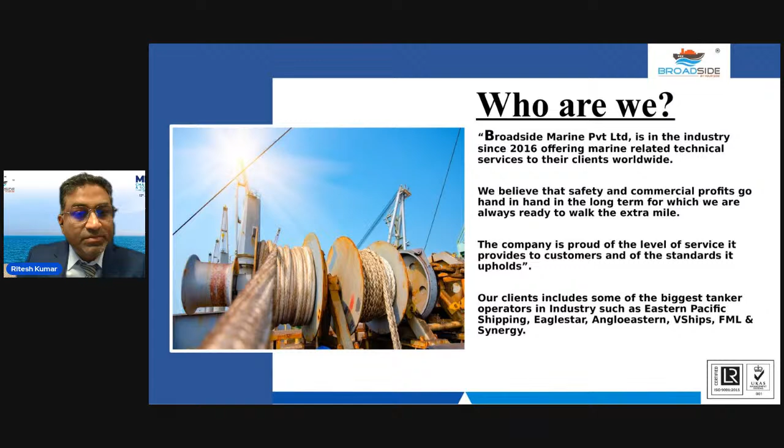Our association and engagement with MEG4 started a little later, in 2019, the year after it was published in 2018. At first, we started with designing MSMP, LMP, which was required immediately. But as time grew, we graduated to provide end-to-end solutions for continued MEG4 compliance.

Today, we provide everything from gap analysis for mooring procedures, designing of MSMP, LMP, mooring reviews, be it vessel specific or fleet specific, risk mitigations, mooring analysis, mooring evaluations, engineering assessments, re-strengthening exercises, and associated shipyard supervision.

Then why are we here? In what capacity? Well, we have helped more than 250 vessels with MEG4 compliance over the last few years. During this period we have gained a lot of knowledge, seen a few gaps, and been able to navigate through those gaps.

In this, we've had a lot of communication with tanker operators, classification societies, shipyards, equipment manufacturers, and rope makers. MEG4 was published by OCIMF mainly for the tanker industry, but it's so comprehensive on vessel mooring that it is now advocated by classification societies and used by IMO for framing rules for new builds after 1st January 2024. And these new builds are not only tankers, but all cargo ships above a certain tonnage.

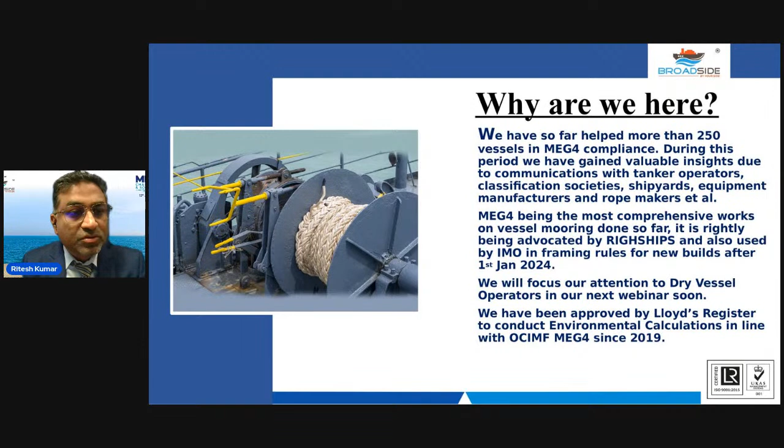We are also planning to focus our attention on dry operators for the same reason. We have been approved by Lloyd's Register to conduct environmental calculations in line with OCIMF MEG4 since 2019. So this was a little bit about me, our company, and our work with respect to MEG4. These are my contact details.

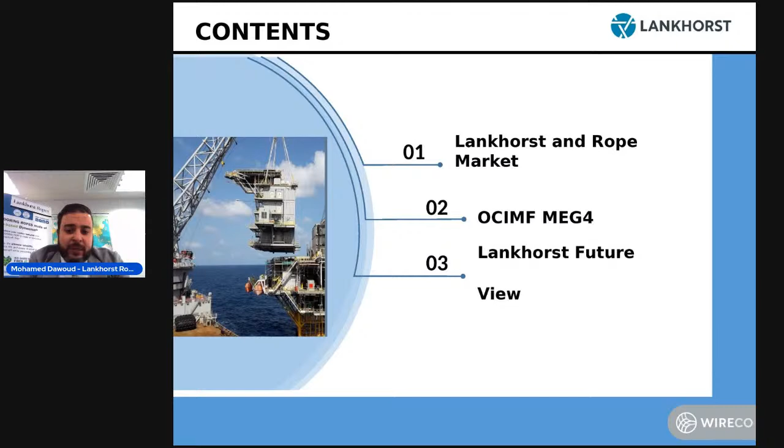Today our presentation will be divided into three topics: a small briefing about Lankhorst Ropes, second about MEG4, and number three about Lankhorst's future view for ropes.

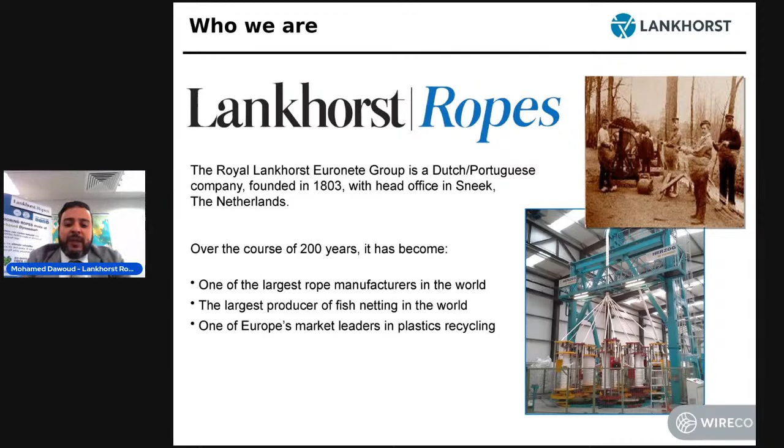Lankhorst Ropes is the world leading rope manufacturer for steel and synthetic ropes with more than 200 years experience. Our head office is in Sneek in Holland. Through 200 years acting as a market leader for manufacturing synthetic ropes and steel ropes, we have become one of the largest rope manufacturers in the world and the largest producer of fishing nets in the world, and one of the European market leaders in plastic recycling.

Lankhorst, we are operating worldwide through our sales offices and global stock points. We like to call them service points, because these points are not only for stocking ropes, but we have a qualified team of splicers who can attend the vessel for inspection, for training the crew, rejacketing for some ropes, and other services.

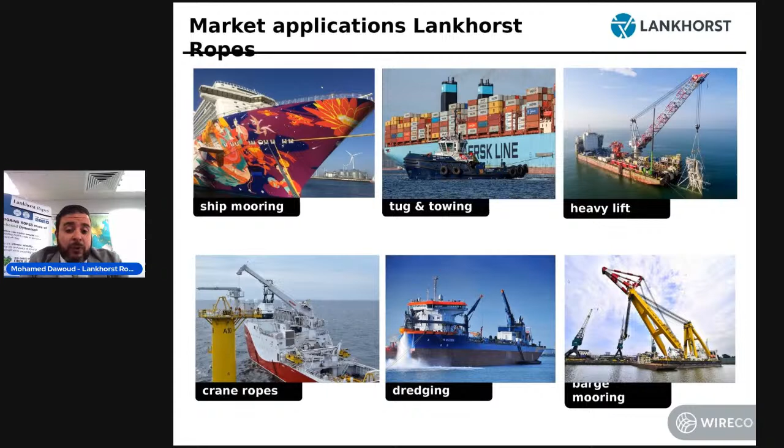We are operating as Lankhorst Ropes in many categories, more than 6 market applications: ship mooring, which we will speak about today, tug and towing, heavy lift synthetic, and also crane ropes, dredging, and barge mooring.

When we speak about OCIMF, as we all know it came in 2018 to enhance safety, which is the core for what we all do, and to enhance the communication and relation between the ship owner, ship operator, and the rope manufacturer, and also to increase communication.

Also, it came with a new terminology, because during MEG3 we had different terminology, like only the MBL, and some rope manufacturers were considering the unspliced MBL, while some of them were considering spliced MBL in their certificates.

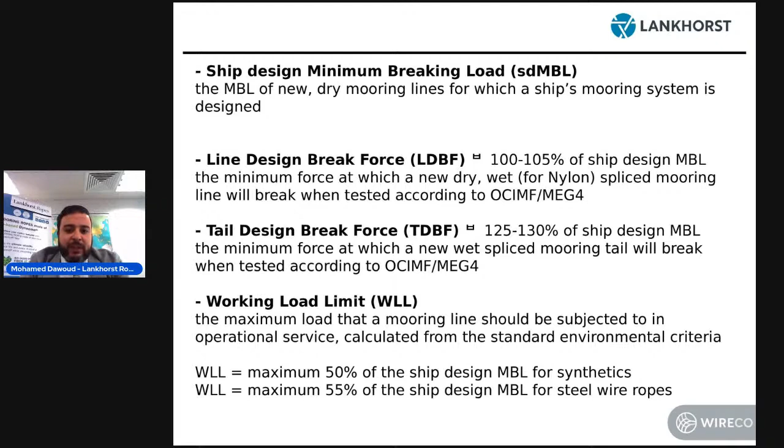So the ship design MBL and the LDBF came to unify and have only one standard, tested accordingly for line, for tails, and so on. MEG4 came with responsibilities for both ship owner and ship operator to comply, by having the ship design MBL defined and also implementing the line management plan. For us as a rope manufacturer, we need to comply, having all our products supplied to the wet cargo segment or tankers comply with the test program.

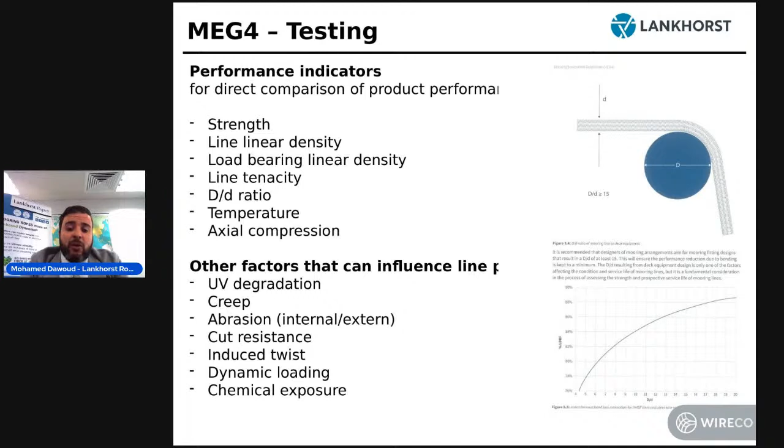So it is a lot of tests to be done. It needs commercial investment from us as well, and it takes time to bring our entire ropes portfolio to MEG4 compliance. We started this since 2018 as Lankhorst for our whole ropes portfolio, but after 2019 we started to see what's happening in the market, and that's what we'd like to highlight to you.

Rope makers or rope manufacturers are divided into 3 groups. One group fully complies with MEG4. They did the tests as per MEG4 and were attested by a third party, by class, and then they started supplying to their customers accordingly.

Group B did no testing at all, but what they did is create a certificate formatted like a MEG4 certificate, attested only by their own quality department, not by any class. So you can have a certificate which looks like MEG4, but when you look at the stamp, it's by their quality department, not by a third party.

Group C, which we feel is more hazardous to the industry, did partial testing. So you can have a rope with a certificate, a coil 3.1 certificate, attested by class. But if you check the type approval certificate behind it, you'll find they didn't do the full test. This is more dangerous, because you are purchasing ropes assuming they comply with MEG4, but they don't. You may have only 10% or 20% of the tests done, and that's what the class attested the type approval based on.

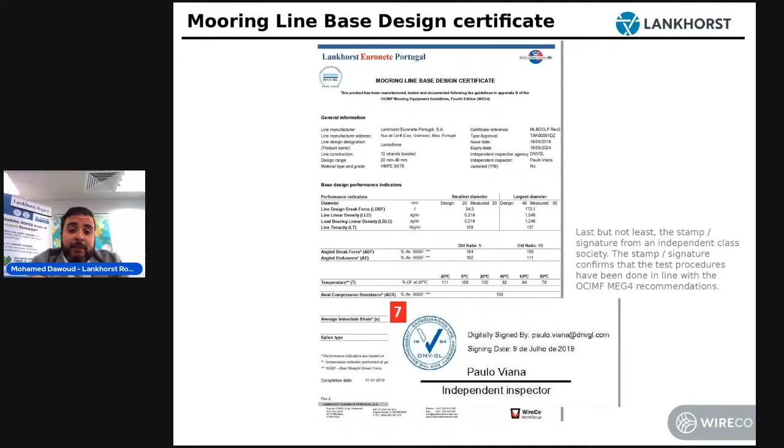Just to show you how the mooring line base design certificate looks like, please ensure that down below, in the right or left, you have a stamp from class - DNV, BV, ABS, whatever - to be attested by class. Also this is a type approval. I highly recommend for all ship operators and owners to ask to see the type approval which has the certificate of the coil based on it.

Please go through it, especially page number 2, and see the two hardest or most critical tests: angled endurance and axial compression fatigue. You can find people who didn't do it correctly, because angled endurance and axial compression fatigue really judge your rope's quality - if your ropes have bad or very low quality, you will not pass.

So some rope makers did partial testing for the type approval, which they will not share with you, but they will share the 3.1 certificate, which doesn't show which tests were actually done. So we recommend that not only the 3.1 certificate that comes with the coil is important, but the type approval is very important, and the base design is very important.

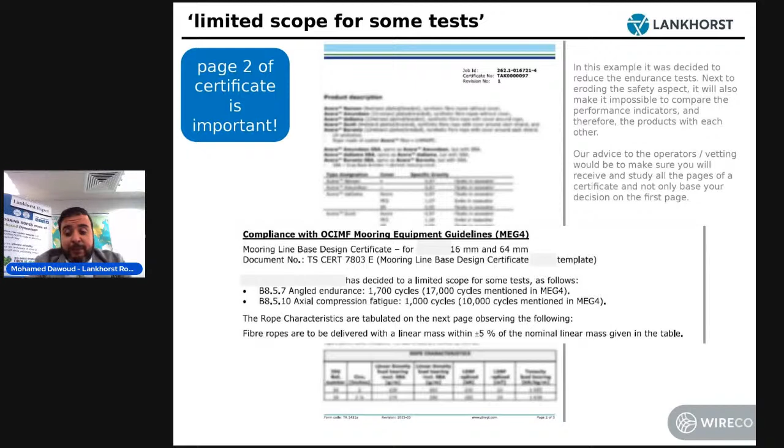We are proud that at Lankhorst, since the launch of MEG4 until today, we have zero comments or observations from any inspector globally. We supply to most of the global fleets worldwide, and we're proud that until now we have zero comments on our ropes. This is what we recommend for tanker operators and vessel owners globally.

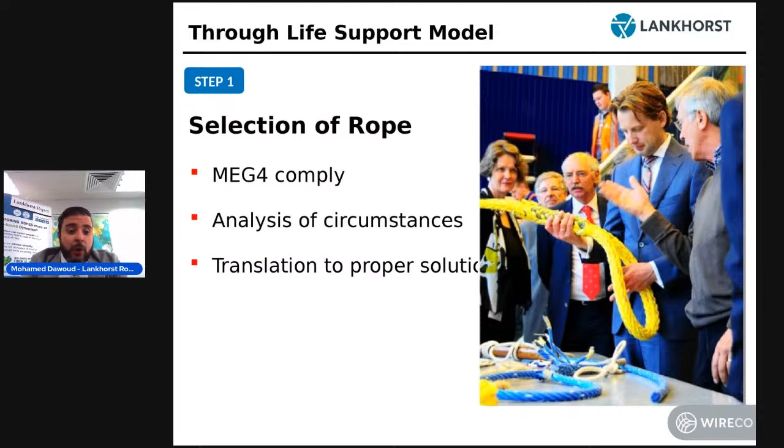When you need to start the ropes procurement process, please start communicating with your rope maker in selecting the rope. As Captain Yazad mentioned, you need to select the suitable ropes for your operation. At Lankhorst we have a wide range of synthetic ropes, but which one can fit your operation?

That comes after the dialogue between the ship operator and the rope manufacturer. Then he can recommend exactly what is suitable for your ropes. Maybe you are facing some problems in your operation, chafing or handling, that you didn't know could be eliminated if you shift from these ropes to other ropes.

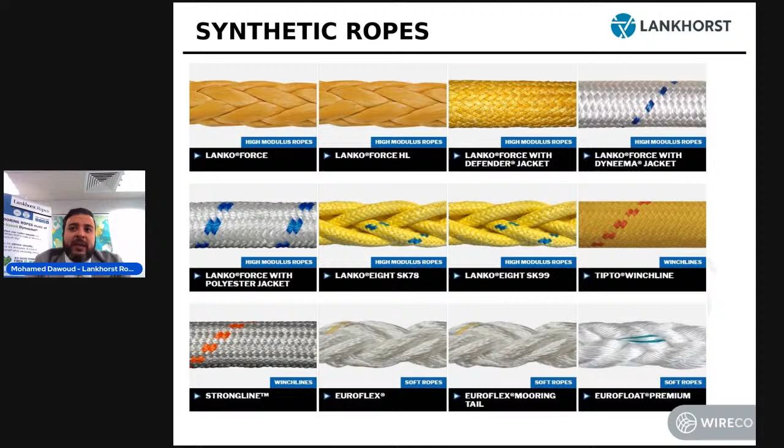We have a lot of successful stories for Lankhorst in West Africa, for example, or in South America. Some of our customers came to us with some issues, and when we changed the ropes to another type, they were very happy. So one of the aims of MEG4 is to increase the communication between the ship operator and the rope maker, which is very important.

Also, for HMPE ropes, what we observed in the market is that some operators think all HMPE ropes are the same, which is not true. HMPE is the scientific name of the rope, high modulus polyethylene, same as if you say nylon, polypropylene, or polyester.

But HMPE ropes are produced by many fiber manufacturers. If you go, for example, with Dyneema, which was the first company to develop HMPE fiber under their commercial name, you have a lot of fiber grades. We always recommend to our customers: don't order HMPE ropes without specifying which grade you are requesting, because some grades are not applicable for mooring, towing, or whatever your application is.

So what we always recommend for mooring ropes is SK78, which gives you at least 3 times more lifetime than any other HMPE rope on hand, and we have a proven track record for that. It gives you 4 times the creep lifetime, and we'll come later on to creep, and also better abrasion resistance. So the grade of the fiber is very important for you to select the HMPE rope that you need to put on your vessel.

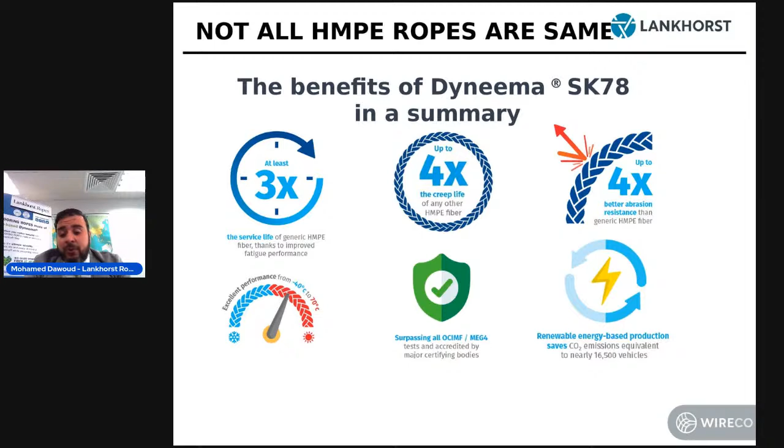Not all HMPE ropes are the same. You can procure an HMPE rope, invest your money, and in the end, after 3 or 4 years, it will be damaged, which is not usual practice with HMPE ropes. Our HMPE ropes, for example, can sustain 10 or 15 years on board for some applications. That's why I say you need to check the fiber grade when requesting HMPE ropes.

One thing we say is creep performance, which is critical to rope lifetime. Creep is the irreversible elongation. The amount of creep is influenced by temperature, tension, time, and type of HMPE rope. So when the rope elongates, it will not come back to its original state - it's irreversible elongation.

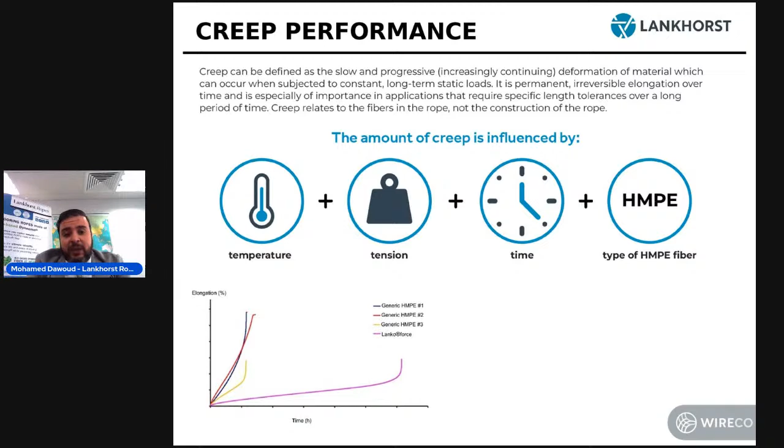Also, for your information, we can run a creep performance report for you. Before you purchase ropes for your application, for your vessel, we can theoretically calculate with some data the creep performance over the years for your ropes on board.

Another thing you need to take care of when procuring ropes is training and installation, and also the manuals and instructions which can guide you through the rope's lifetime. For us at Lankhorst, we consider that the journey with our customers starts with the supply, not ends with it. When you supply the ropes, you need to take care of training, installation, and provide the manual for when he needs to make end-to-end connections, rotation of the ropes, cutting, and retirement criteria. So it's a lot of things.

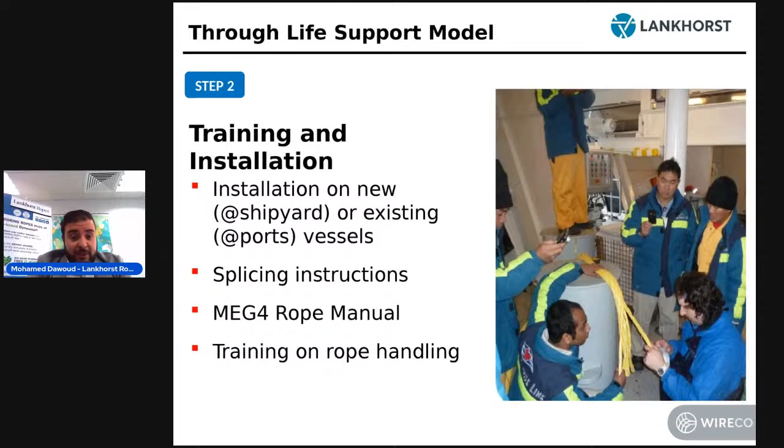So training and installation is something you need to take care about, and also to increase your crew awareness of HMPE ropes, which is not being treated as polypropylene, polyester or nylon. Or if you convert from steel to HMPE ropes, you need to increase the awareness of your crew that this is not the same as steel. It is the same as steel in elongation, but handling is different. So you need your crew to take care about what ropes they are using.

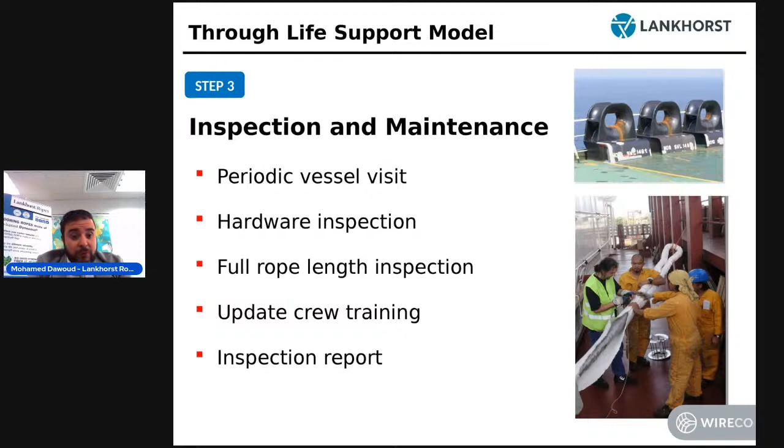That's why in inspection and maintenance, we as Lankhorst provide this to our customers globally for increasing the awareness, because we see that the key for having more lifetime for your ropes on board is to increase the awareness of your crew. It's one of the items we need to make happen. Also, residual strength testing.

As Lankhorst, we were doing this before MEG4 for many of our customers, especially in tug and towing. But when MEG4 came and said you need to do it to set retirement criteria, we really actively started doing it for our wet cargo customers globally, taking samples from the ropes to our laboratory, testing them, and sending the report to our customers with recommendations, which adds a lot of commercial benefit to many of our customers. We did it not only for ropes but also for tails, and we successfully increased their lifetime from 18 to 24 months. If you accumulate that, you can see how much commercial benefit it brings.

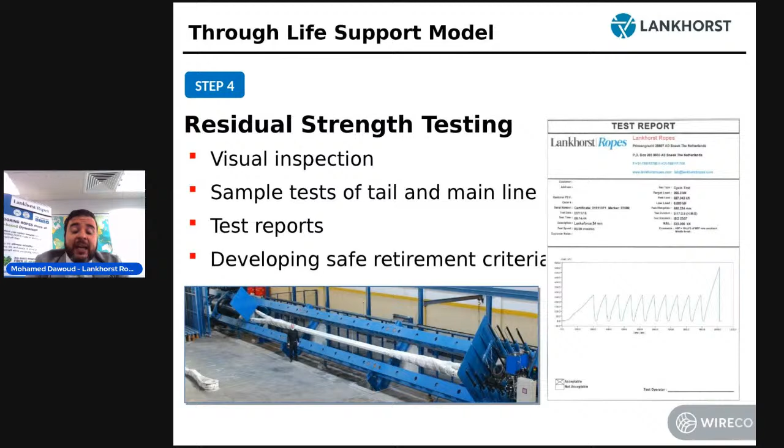This is one of the main things - communication with your rope maker is very critical and important. Recycle and retirement of ropes - as Lankhorst, we accept under agreement some of our ropes to be recycled and used as a polymer product, like deck sheets or for charity purposes. This is also one of the things we do.

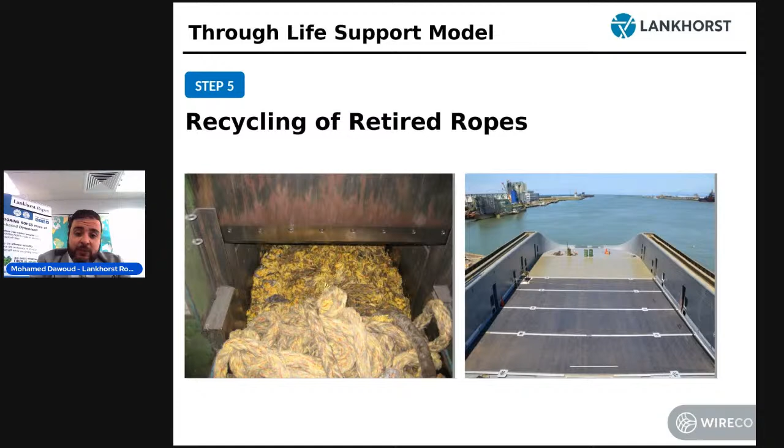Also the online access certificate - I think this is very important, especially for companies who have a big fleet. One of the challenges tanker operators face is due to crew changes and similar issues, you sometimes miss certificates of the ropes, and then an inspector comes on board the next day and you start to panic searching for the ropes.

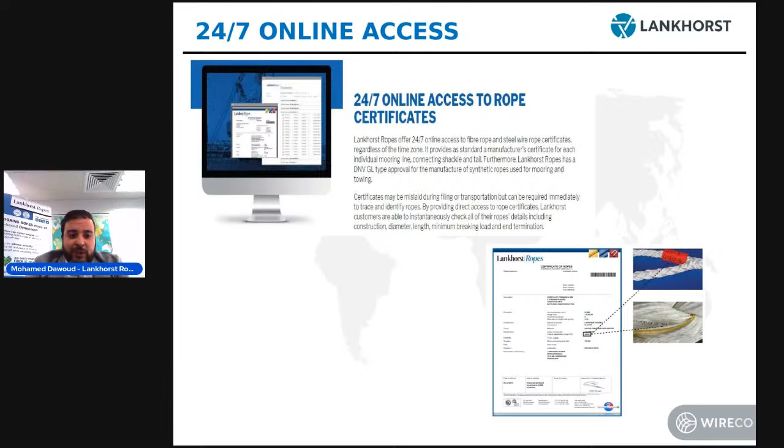So for Lankhorst, we have an online certification portal where you get a username and password, and you can download the certificate whenever you like, from the office, from the vessel, from anywhere you are. You can download the certificate with one click.

And the last part, we are speaking about how we see the future for mooring ropes. We are focusing in our R&D on safe and easy operation, sustainability, and digitalization. I will pick one to highlight because of the time limit - I will speak about sustainability.

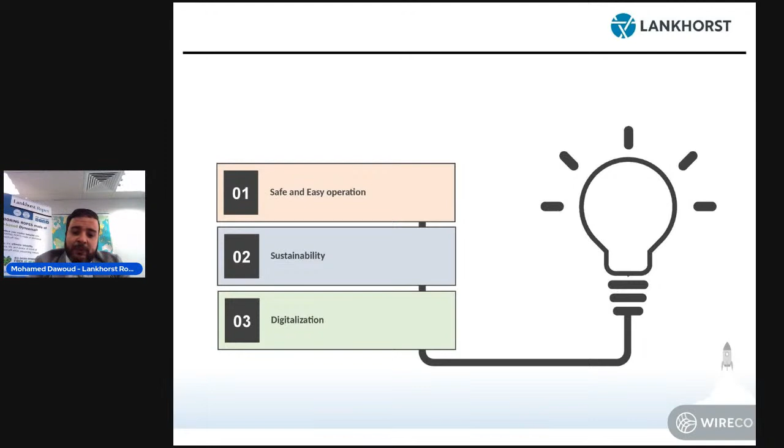Lankhorst Ropes is the first rope maker to produce and supply a bio-based Dyneema fiber. So it is Dyneema ropes, HMPE ropes, but coming from bio-based fiber, and we supply many of our customers with the ISCC certification - International Sustainability and Carbon Certification. It's the same, it's MEG4 - everything is the same, but it increases the sustainability credentials for some of our customers.

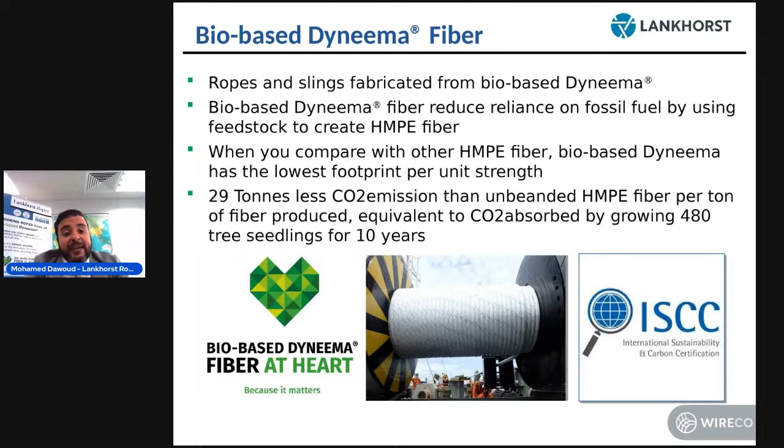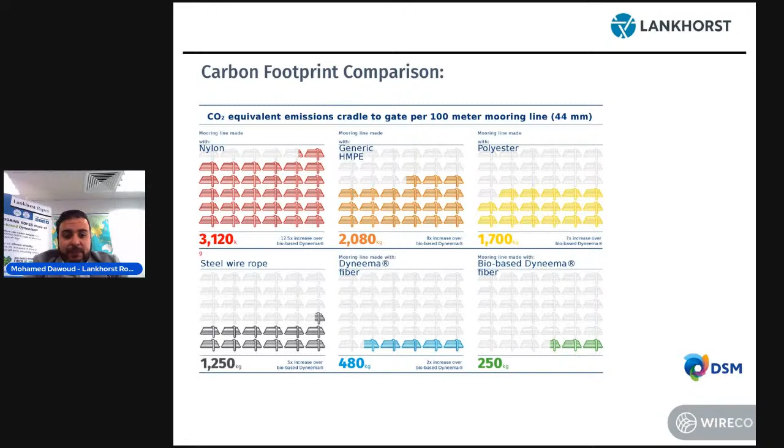For your information, producing 100 meters of 44 millimeter rope from nylon will make 3,120 kg of CO2 emissions. But if you go for example with bio-based Dyneema, you will produce only 250 kg CO2 emissions. So you are contributing to environmental protection, which we encourage many of our customers to do. Actually, we now have a lot of customers specifying the bio-based version, because there is no big difference between both, but it contributes to their sustainability credentials.

Last but not least, I need to just highlight two slides. Quality. Everybody, every rope maker or anyone supplying any service or product, says we have quality ropes. But what does quality mean? So what I'm requesting from all tanker operators is that you need to dive into the ropes.

Construction, coating, and also fiber grades and where it is produced - all of these things you need to dive into, to define which rope is suitable for your operation. Because in the market, we have a lot of cases where the rope manufacturer only gives the tanker operator or customer a copy of the certificate, the 3.1 certificate. But you need to go beyond that. You need to request where this rope is being manufactured - is it manufactured under the same brand or in a different third-party factory? Is it under their quality department or not?

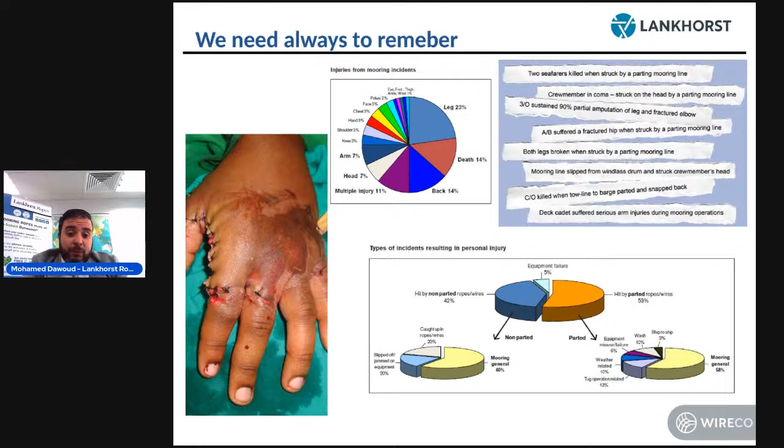And also for the type approval, and also for base design certification, you need to define which ropes and which quality can fit your ropes in order to eliminate and reduce the risk. We always remind ourselves and our customers that we are all working, from the rope manufacturer side and the ship operator side, for the safety of the crew, which is always our top priority. As per the latest statistics, 53% of incidents on board came from parted ropes, and 14% of it bring risk for the human element, which we need to address together as rope manufacturers, tanker operators, and other operators to communicate and filter what is supplied on board in order to eliminate all of this risk and hazard.

I would like to thank you all for your time. Please, if you would like to continue the conversation, or if you have any other question, you have my email address. You can text me anytime, and I will be happy to be in touch with you. Thank you very much.